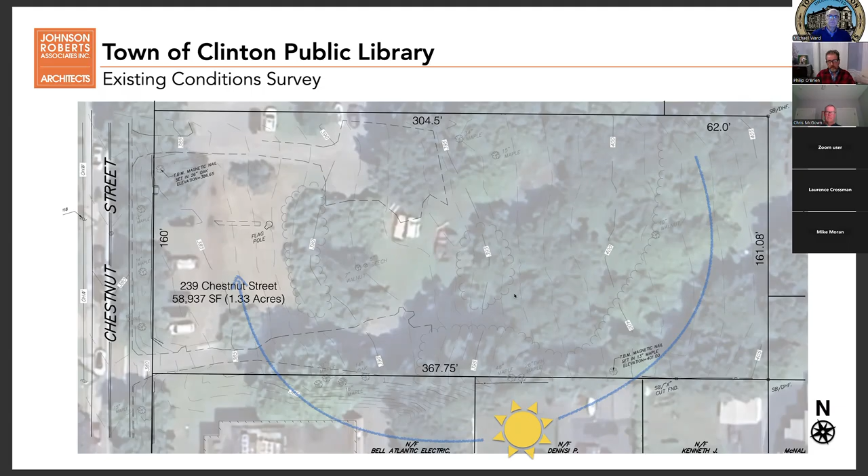The south face—thinking about things like the potential for solar, for photovoltaics on the roof potentially, sun coming in, northern light from the opposite side, clerestory windows—a lot of the things we've been talking about and people have suggested we consider.

This is the image we got from one comment that included this photograph. This photograph is actually great. All the other photographs we took on site, and that you see on Google, have leaves on the trees, so it's difficult to see the site from those.

But this is obviously where the building is going to sit, standing here at Central Park. It's going to be an important part of downtown, one of those buildings that you see. We want to be careful about that, and we also want people to be able to see it and be drawn to it.

So obviously we don't want to look like a house, which is what this building looks like, and we don't want to look like a brick box like the Verizon building. There isn't a real signature style downtown—it's kind of a mixed bag, and that's kind of what we're thinking about.

So, floor plans. We've got some revisions based on feedback we've had from you all, from the Board of Library Commissioners, and so forth. A lot of the same big moves are still here—we tried to clarify some things on the plan that I think helps with the flow.

This is the lower floor street entrance. We've got a door that comes right out to a plaza facing the street so folks can see it from the road. We've also got one facing the parking area that rides up the slope, and we've moved that entrance up to the north so it's closer to the pedestrian and vehicular access, so folks don't have to walk down to this corner of the building from the parking lot.

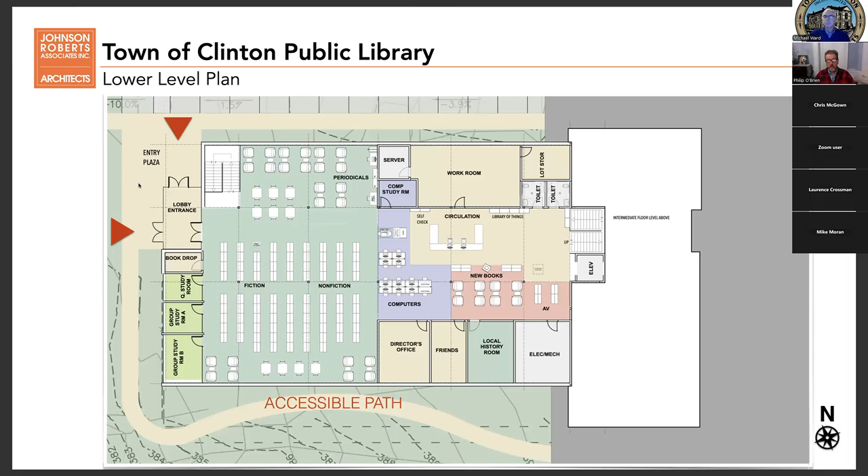We've got a book drop close to the street and the parking area on a lower level. And then we've got our quiet study rooms across the front, looking out towards a plaza and a potential garden at the front.

If we go upstairs, one of the bigger moves that we made here is we took the split level floor here and we flipped it north to south. So the makerspace now is up at the top on the north, and the meeting room is down on the south. There's a couple of reasons we did that.

We actually took the main body of the building and slid it northward so it's a little closer to the parking area. And that opens up a lot more green space on the south side of the building, and we're trying to take advantage of that.

Along this accessible path here, we'd like to do some things like small places to stop, a bench, a little garden, a place where you could go out and read a book and take advantage of the south side of the building over here where it's sunny.

Taking advantage of views that come out of the building from both floors out to this area as well. And they may be better than looking out across the parking lot and at the neighbors, depending on the cars they have in their yard and so forth.

We're trying to take advantage of these views out to the garden area and then out to the center of town. So that's part of the reason that we did this flip.

The other reason we did that is that we've created this plaza up here, and it spills out directly from the meeting room out of the emergency exit. So you could use this as an outdoor space, and it could support the meeting room if people were going to flow out for an intermission or something like that.

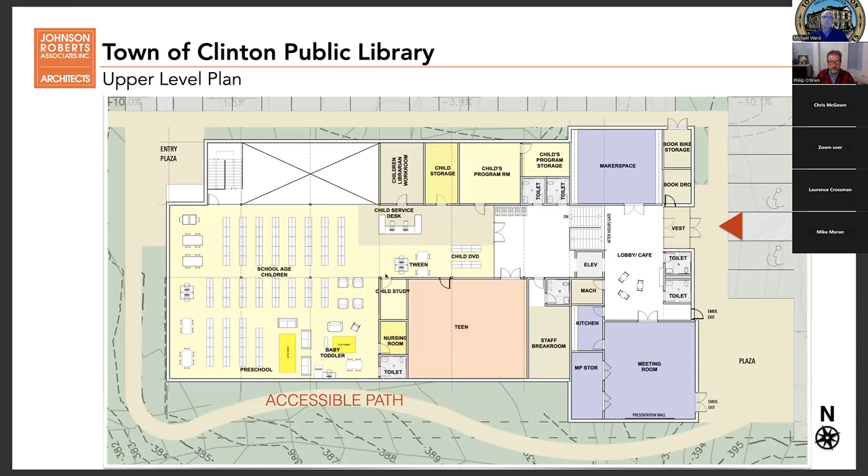All right, so here's a diagrammatic site plan. This has been worked out with our civil engineers. We had the path, when they originally drew it, with the driveway on one side, then it rolled over to the other side, so we talked to them and flipped it back again. So the driveway runs up alongside and the parking is against the building, and that way we can get the grading to work there.

We're showing a total of 59 parking spaces here, and we can still get this small plaza. We talked about wanting a spot where children could go outside that isn't necessarily out in the front, close to the road, so they'd have an opportunity to have a space for a program outside. Now this isn't designed yet, but the idea is this is a placeholder for some things—there could be some seating, or we may build in some planters to separate that from the cars and so forth. That's the idea.

It needs a little bit more development. We've got a lower section here, some additional grade we're picking up, and then a higher section of parking. We're picking up the grade in this island right here and showing some planting there. We may have a rain garden or something in there—we don't know until we do a little bit more design work.

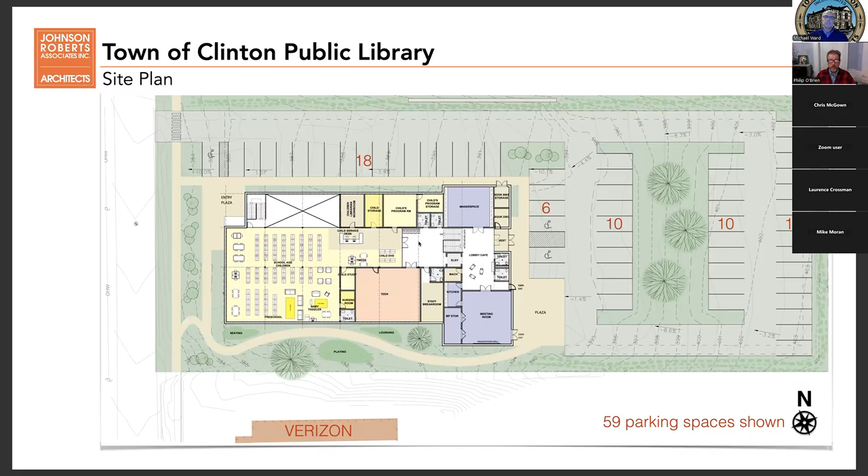And then the last bit I have is massing models. Massing models are kind of what they sound like—these aren't designs, although the beginnings of some of that stuff are starting to show up. It's really about the scale of the building, the size, and the forms it takes, how it fits on the site and so forth.

We've got a couple different colors on here, but they don't really represent fixed materials yet. We have some ideas of where the windows are going to go, but we haven't really done the design work. Rather than just show you a plain box, we put some windows on and some roof overhangs to give it a little scale so folks can understand it.

So I'm just going to walk you through those. We've got 4 images. This is from the street, slightly north of the building, looking back. The Verizon building would be over on the right-hand side here, and this is the driveway going in. We've got the street entrance down at the lower level here with a door that comes out to the parking area and another door that goes out to the plaza facing the street.

The idea here is we have a sloped form. This roof faces south, so there's the potential for photovoltaics on that roof. By bumping it up here a little bit, we've got some clerestory windows, and we can bring some nice blue northern light in without a lot of glare, getting some natural light into the center of the plan. These tall windows also help us get light pretty deep into children's, because there's an open space here on the second floor.

Going up around the back, you can see there's the maker space and the bike storage—that's children's up there. And then down below, the quiet study and the adults department is in there. As the grade climbs up, we've got a kind of regular windowsill height, whereas down here closer to the street we're pretty close to the floor. But we're still able to get some windowsill height spaces in the workroom behind the desk, and these windows would go into the children's workroom.

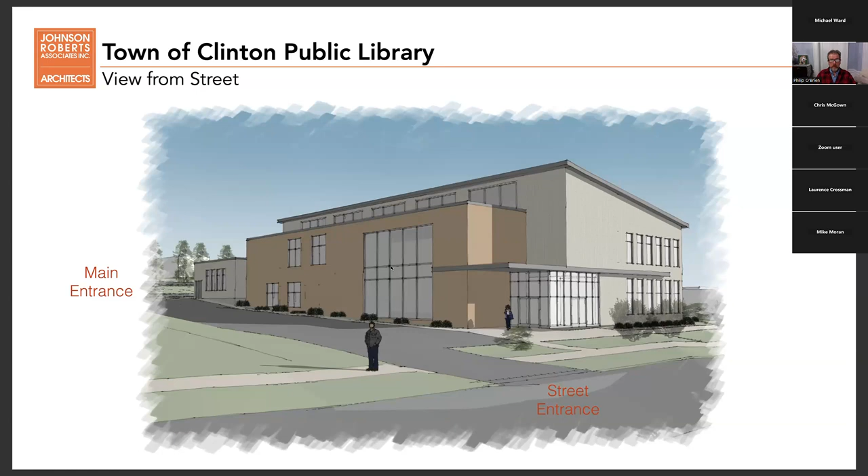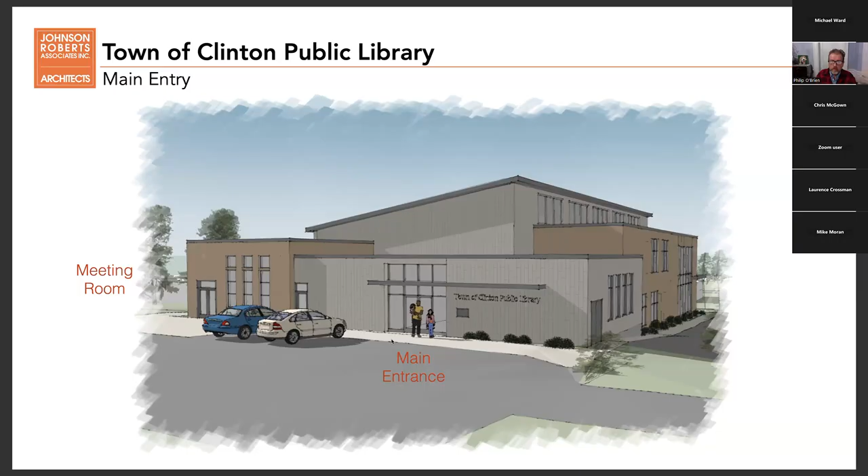So here's a shot again from the street, but on the south side. There's the meeting room out there poking out. There may be some windows up that will end up in there. We haven't really designed that.

Looking at some options for windows here. Again, children's department up at the top. Some great views out to these garden spaces and this accessible path that runs up along, maybe some places to sit, chat with your friends, take advantage of the nice weather, create some nice views looking out these windows.

There's the entrance that faces out towards the parking lot and towards the street. We're looking at a little patio plaza here. Probably do some planting along between the patio and the entrance plaza and the street. I'm just kind of roughing that in right now.

And again, there's that southern sloping roof that we could potentially do photovoltaics on.

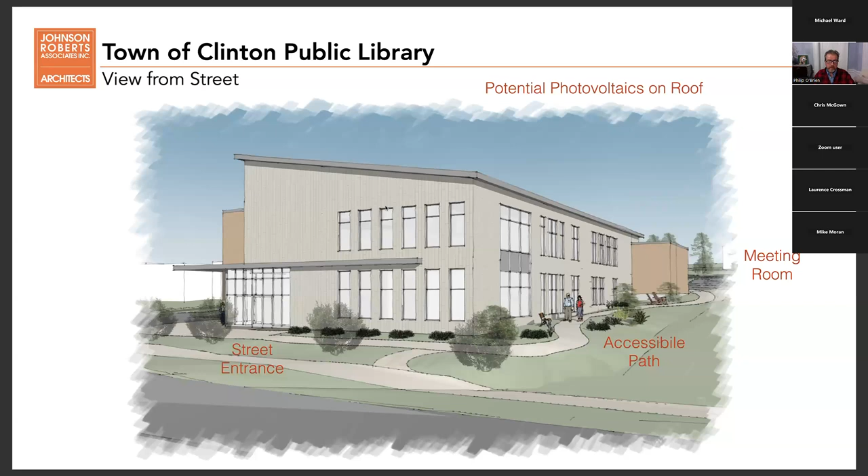And the last view we have is kind of similar to that photograph taken from Central Park. So you're kind of standing on the corner of Central Park here on the sidewalk, looking up towards the building, and there's the Verizon building. There's that Victorian on the corner that apparently used to be a store at some point. And there's how the building kind of addresses the street.

Lots of glass on the street and facing out to the south. There's that garden space along in there. So we're really trying to make it inviting, make it obvious that it's a public building. You can imagine some signage potentially over the canopy here that would say library, or on the face of the building potentially, to kind of draw people down there.

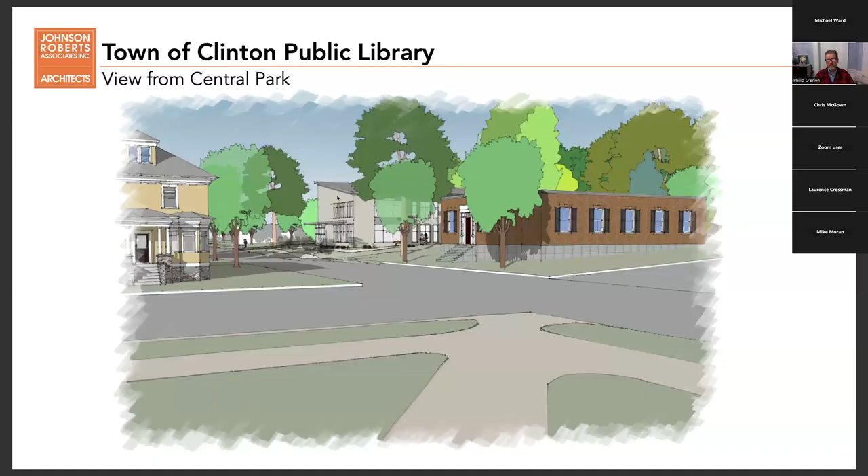I think it looks great. Oh, good. Yeah, I agree, I think it's a good start for sure. Obviously it doesn't show what types of materials or what the building's made out of, but that's fine, you know, that's...

Can I make a comment, Mr. Chair? I will disagree. I'm actually pretty disappointed. I think it's a big box and it's in a Victorian neighborhood next to beautiful Victorian structures, next to an Italianate town hall. And it doesn't reflect what our town center looks like at all. It looks like a big square box, like an elementary school, frankly.

So I would have to tell you that my own opinion is I love the plan and I love the site, but I really don't like the architecture of the massing of the box. I don't think it's in keeping with that neighborhood. I mean, I know the Verizon building is a very ugly take on that corner, but it's basically a big square box with a flat roof on it for solar panels. So I don't know, that's my take.

Okay, well, our feelings aren't hurt. No, I mean, listen, I know that's very beginning, and I would, like I said, I think the plan is really good, and I think the site plan is really good. I just, but I'm only one person, and probably one of these two. No, I think you're right.